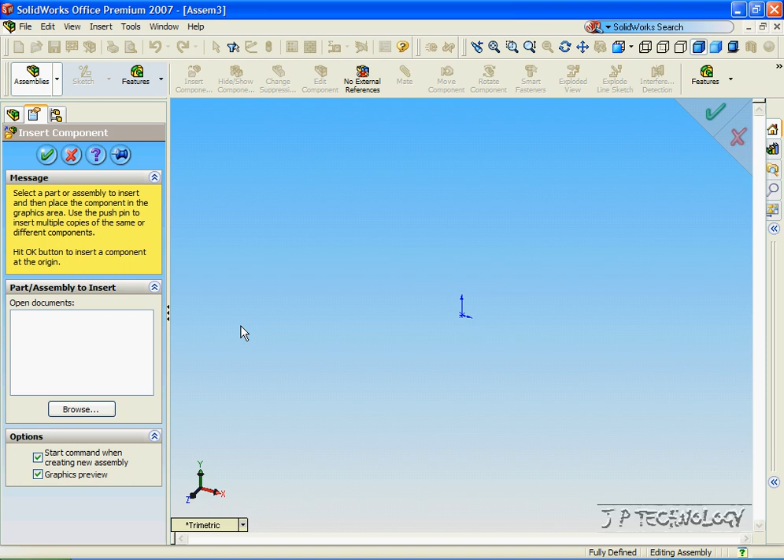So to start off, let's click Browse, and let's open up the top part. Click Open. To put it onto the origin, you put the cursor right on the origin, and the two origins will match up. Click OK, and now we've put in our first part.

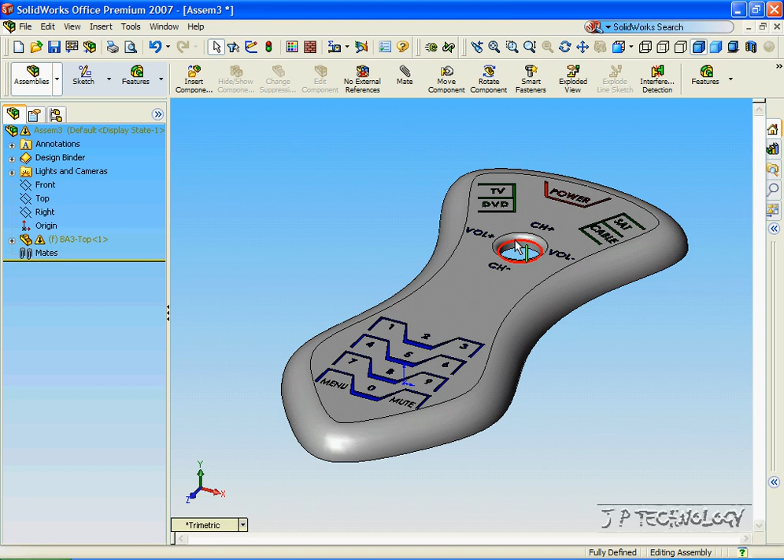Now let's get the joystick or the button, and we'll mate it. Let's click Insert Component, click Browse, click Button, click Open, and we'll put it to the side for now.

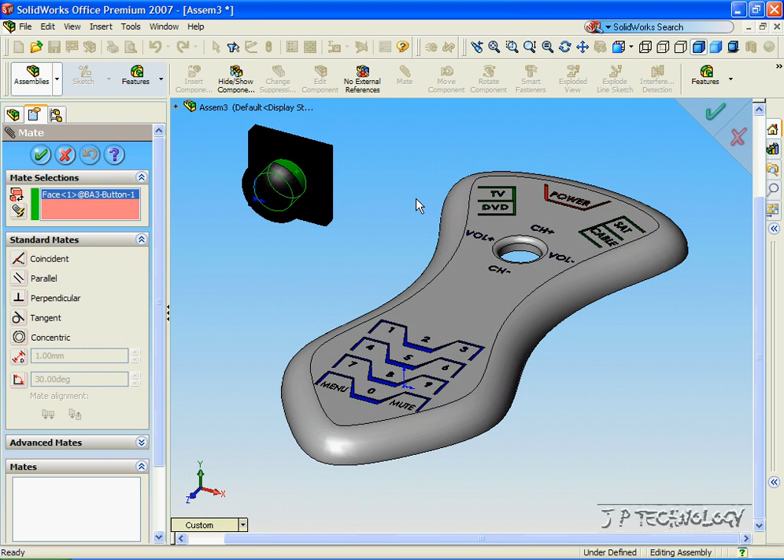Now for the first mate, let's mate the two circles - this circle here and the circle of the joystick. Let's click Mate, click this circle, and we'll click this circle here. We're going to make a concentric mate between those two. So what that means, when we click OK, is that these circles are going to be in line all the time.

So you can move it up and down, side to side, but this circle is going to be inside of that circle at all times.

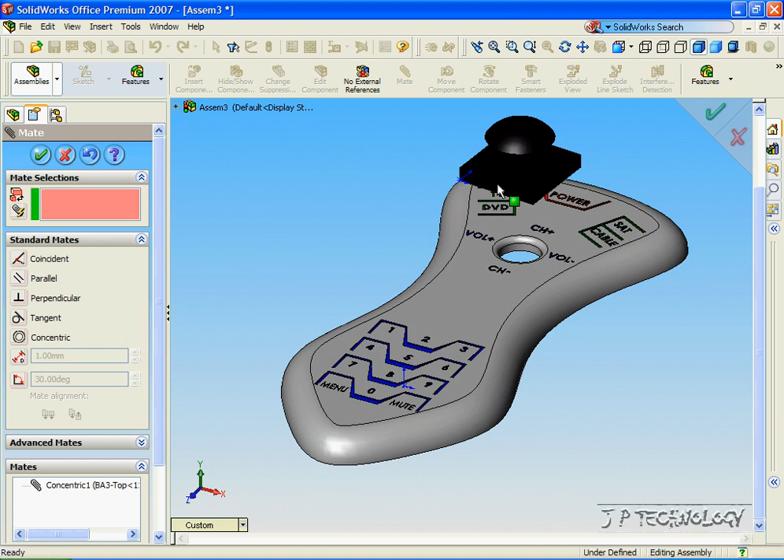Now let's make another mate, so let's stop this from moving side to side. Let's click this face, and let's go to the bottom, and let's click this face, and we're going to make them coincident. Click OK.

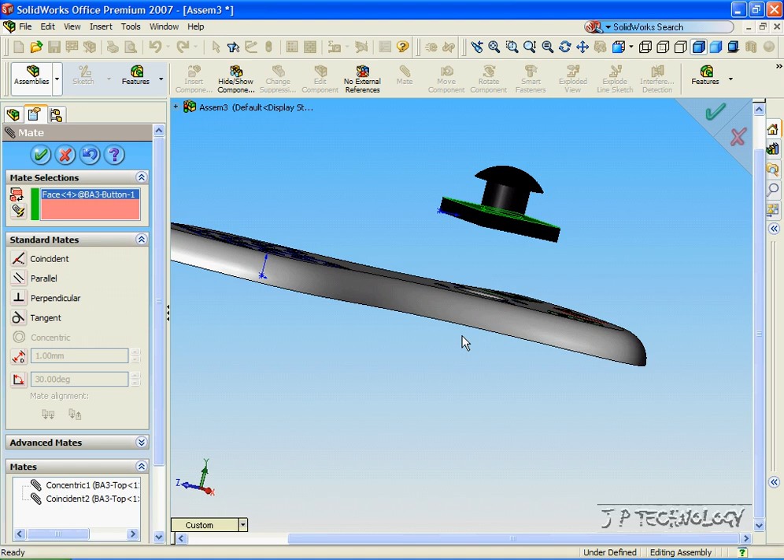And now when we look at the part, it doesn't move side to side, it just moves up and down. So let's restrict the up and down. Let's click the top face, and let's click this face, and we're going to make it coincident, and click OK.

And now this button's fully defined. It doesn't move in any direction. So let's click OK.

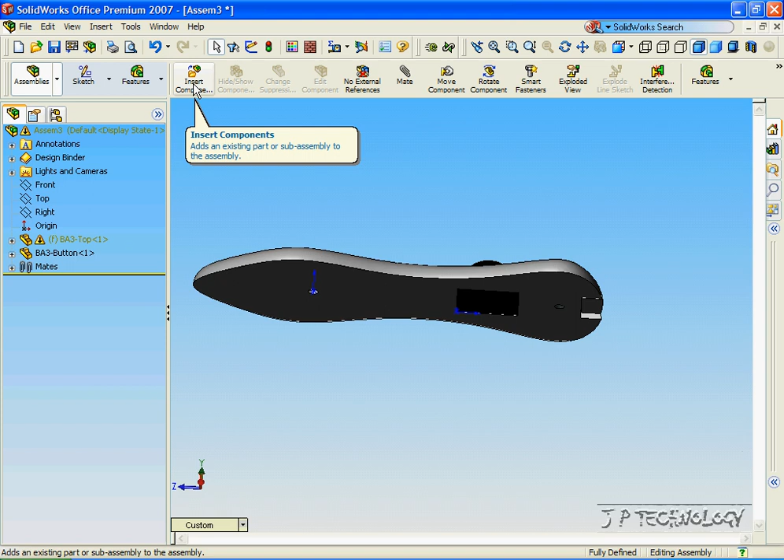And now let's insert the infrared light. Let's click Insert Component, click Browse, click Light, and click Open. Let's just put it to the side right now.

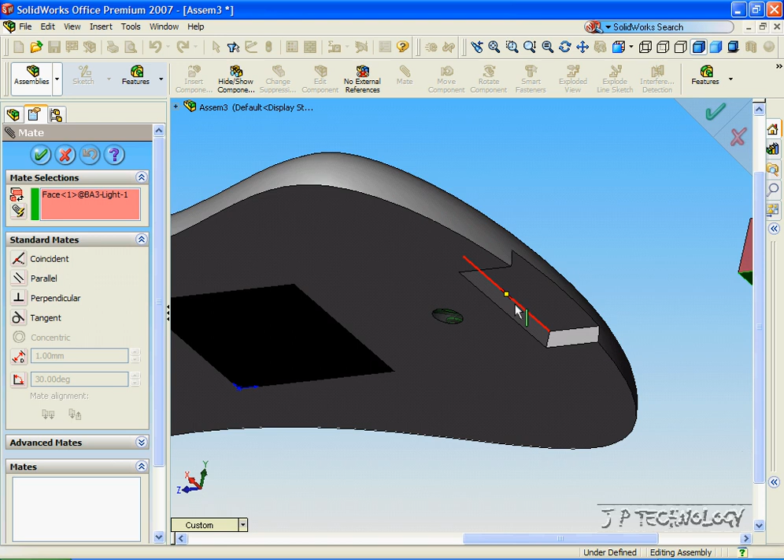And we want to insert this light into this little compartment here. So to start off, let's click this side, click Mate, and let's click this side of the remote. We want to make it coincident. Click OK.

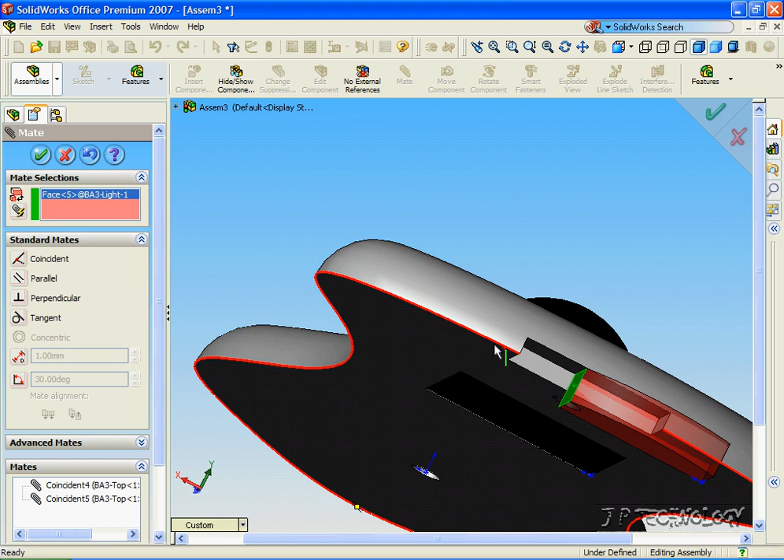Now let's click the top face, and click this face, and click OK. Now it can still move side to side, so we want to restrict that. So let's click this face and this face, click OK.

And now this component is fully defined. It won't move in any direction.

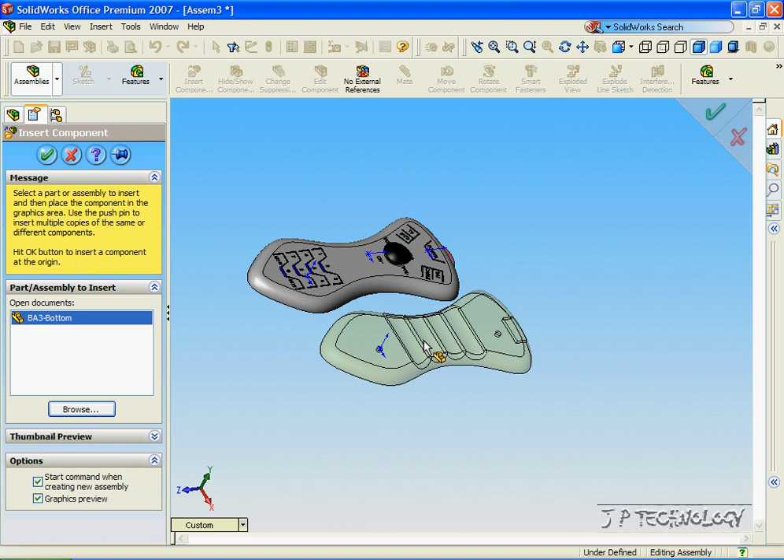Now let's get the bottom of the remote. So let's click OK, click Insert Component, click Browse, click Bottom, click Open, and let's just put this in.

Now we want to make the bottom of the assembly, and we want to mate it to there. In this I have two holes protruding on each side so that we can make concentric mates here and here, and we can limit the movement of the controller.

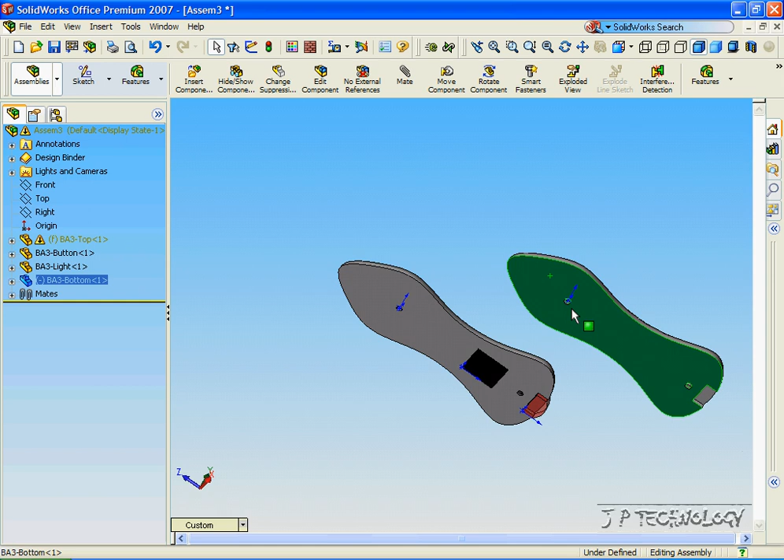So let's click this circle here, click Mate, and let's click this circle here, and we're going to make a concentric mate, but as you can see, it's not the right alignment, so we have to flip it and click OK.

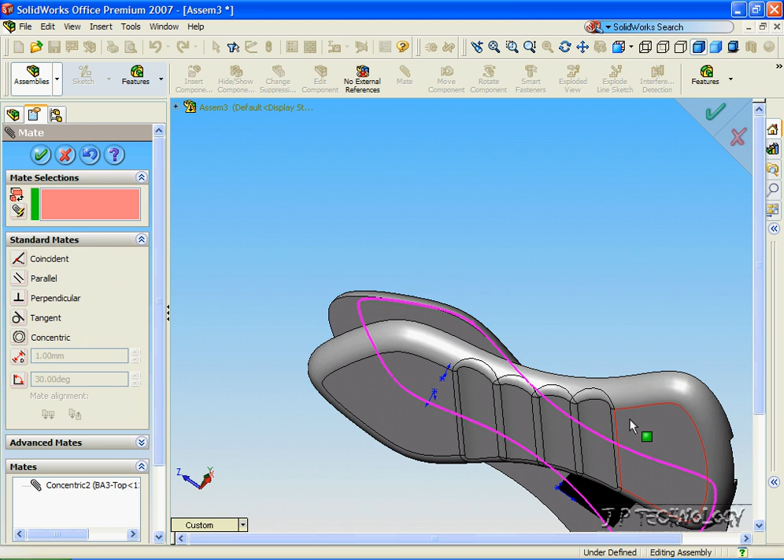And as we only have one mated, it's going to be swiveling on that one point. So let's mate the other circle.

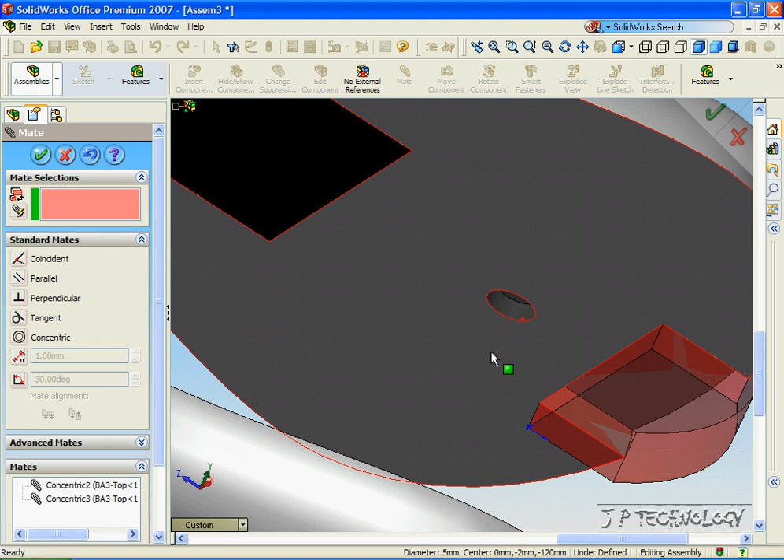So let's click this one, and this circle here. And we're going to make that concentric. Click OK. And now it doesn't move side to side, it just goes up and down.

So we're going to have to mate the bottom to the top. Let's click this face, and let's click this face, and we're going to make it coincident. Click OK. And now the bottom is securely positioned and it's fully defined.

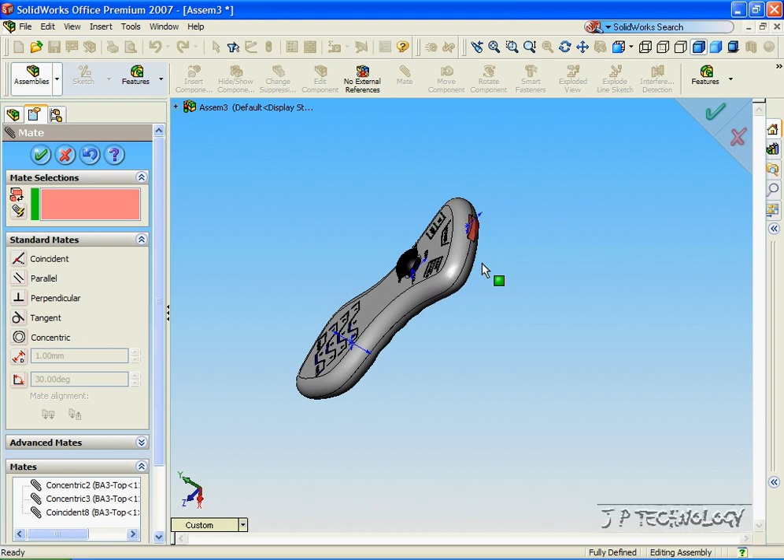Click OK. Click View, click Origins, we'll take those away. And now we've created the TV remote fully defined. There's no moving parts, it's just an assembly of all the parts to create one component.

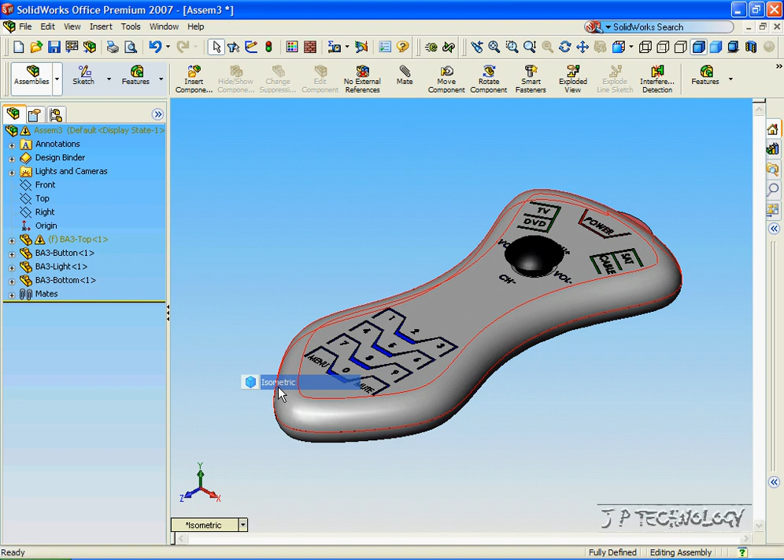Click Isometric View. And that's it. That concludes our tutorial on how to make a solid assembly within SOLIDWORKS.